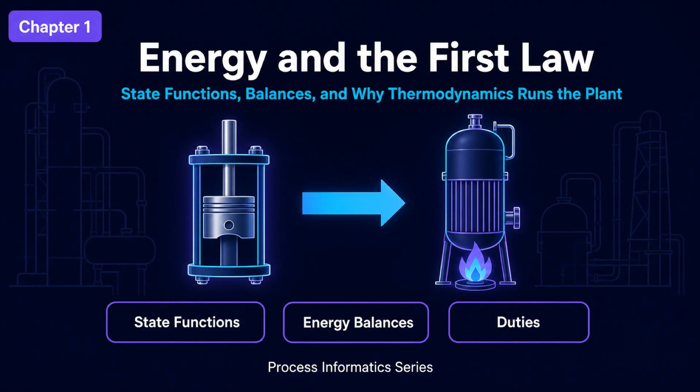Thermodynamics answers 3 questions that no rate law can touch. First, how much energy does a transformation require or release? Kinetics tells you how fast a reaction runs. Only thermodynamics tells you how much heat you must add or remove while it does. Second, how far can it go? Equilibrium is a thermodynamic limit. A better catalyst reaches it sooner. Nothing takes you past it.

Third, which direction is spontaneous? Whether a process runs by itself or has to be driven, and at what minimum cost, is decided by the second law, which is Chapter 2. That gives us the division of labor worth memorizing: kinetics governs rate, thermodynamics governs possibility and price.

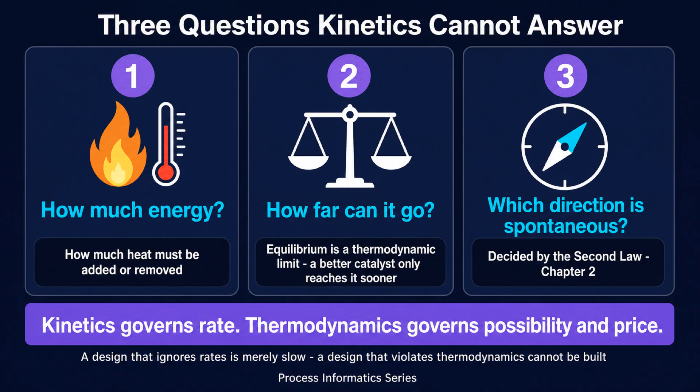The practical consequence is asymmetric and worth pausing on. A design that ignores rates is merely slow, and you can usually fix it with a larger reactor or a better catalyst. A design that violates thermodynamics cannot be built at all, and no amount of engineering effort will rescue it. That is why thermodynamics gets checked first.

Every thermodynamic statement begins with a choice: what are we accounting for? The region selected is the system, everything else is the surroundings, and the imaginary surface between them is the boundary. That boundary is chosen by the engineer, not given by nature. Draw it around one heat exchanger and you get its duty. Draw it around the plant and you get the site utility bill.

Systems are classified by what the boundary lets through. Open systems pass both mass and energy, which covers pumps, reactors, heat exchangers, and columns, so most of a plant. Closed systems pass energy but not mass, like a sealed batch vessel. Isolated systems pass nothing, an idealization used for reasoning.

Now the most useful distinction in this chapter. State functions, such as internal energy, enthalpy, temperature, pressure, and volume, depend only on the current state. Path functions, heat and work, depend on how the system got there. Because a change in a state function can be computed from tables without knowing the path, steam tables and process simulators are possible at all.

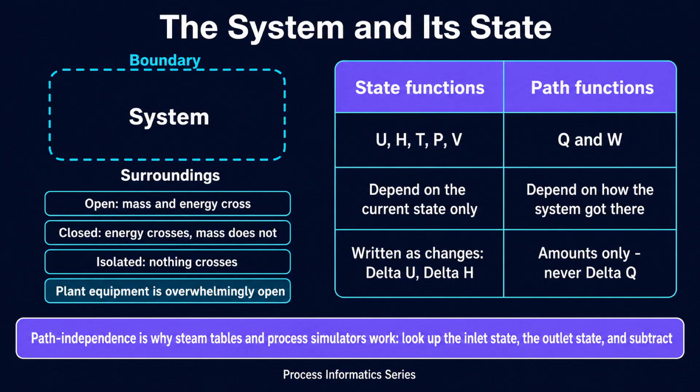The first law of thermodynamics is conservation of energy with heat and work counted honestly. For a closed system, delta U equals Q minus W. The sign convention must be stated explicitly, because textbooks differ. Here, as in most chemical engineering practice, Q is positive when heat flows into the system, and W is positive when work is done by the system on the surroundings. Heat in raises internal energy, work out lowers it.

Most plant equipment is not closed, though. It flows. For an open system at steady state with one inlet and one outlet, neglecting kinetic and potential energy terms, the working form is delta H equals Q minus shaft work. The reason enthalpy appears instead of internal energy is that flowing material carries its own pressure-volume energy across the boundary, and enthalpy bundles that in by definition. H equals U plus PV. For a heat exchanger, a reboiler, or a condenser, there is no shaft work at all, and the equation collapses to the most used expression in process engineering.

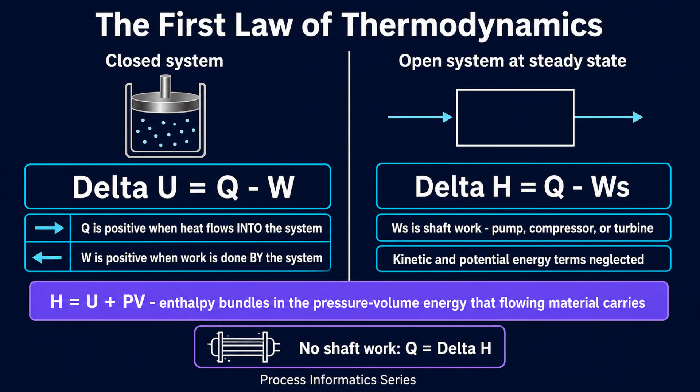Q equals delta H. Let's put numbers on it. Take 1 kilogram of liquid water at 25 degrees Celsius and turn it into saturated steam at 100 degrees Celsius and 1 atmosphere. The path splits into 2 physically distinct steps.

Step 1 is sensible heat, warming the liquid. Using a specific heat capacity of about 4.18 kilojoules per kilogram per Kelvin, heat is mass times heat capacity times temperature change: 1 times 4.18 times 75, which gives 313.5 kilojoules.

Step 2 is latent heat, boiling it at constant temperature. Using a latent heat of about 2257 kilojoules per kilogram, that step costs 2257 kilojoules. The total is 313.5 plus 2257, which is 2570.5 kilojoules.

Now look at the split. The vaporization step costs about 7.2 times as much as heating the liquid through those 75 degrees, and it happens at constant temperature, so a thermometer reports nothing at all while the great majority of the energy goes in. That ratio is the reason evaporation and distillation dominate plant energy budgets. Boiling is where the money goes.

Specific heat capacity is the energy needed to raise 1 kilogram of a substance by 1 Kelvin at constant pressure. It is a material property, mildly temperature dependent, and for hand calculations, an average value over the range is normally good enough. Compare a few classes of material.

Liquid water sits near 4.18 kilojoules per kilogram per Kelvin, with a latent heat of 2257 kilojoules per kilogram at 100 degrees Celsius and 1 atmosphere. Organic liquids run about 1.5 to 2.5, with latent heats of roughly 300 to 900 kilojoules per kilogram. Gases are of order 1.

Liquid water is a conspicuous outlier, roughly twice the heat capacity of a typical organic liquid, which is why it is both an excellent coolant and an expensive thing to boil.

The pattern across the table is the practical rule of this chapter: phase changes are expensive, and temperature changes are comparatively cheap. Heating an organic liquid through a large 50 Kelvin span costs perhaps 75 to 125 kilojoules per kilogram. Boiling it costs several hundred.

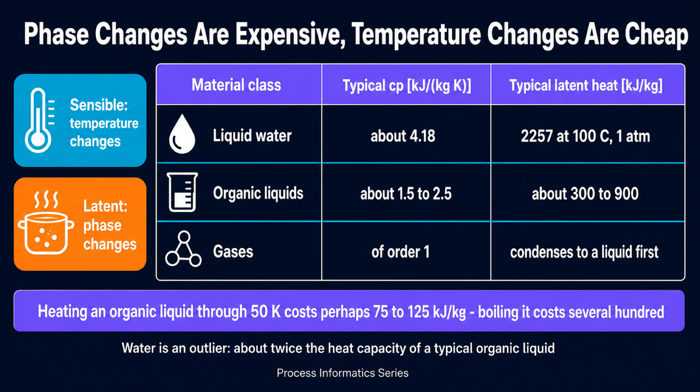On a flow sheet, the first law becomes an arithmetic you can do on the back of an envelope. For a stream of a given mass flow rate, with no phase change, the heat is the mass flow rate times the heat capacity times the temperature change. With a phase change, it is the mass flow rate times the latent heat.

The result, called the duty, is the required heat rate in kilowatts or megawatts. It sizes the exchanger, it sets the steam or cooling water flow, and it lands directly on the operating cost line. This is why a distillation column's reboiler and condenser are usually the largest utility consumers on a flow sheet.

A column does not merely warm its feed. It boils a stream at the bottom and condenses it again at the top, repeatedly, because the reflux return to the column must be vaporized once more on every pass. Multiply a latent heat of hundreds or thousands of kilojoules per kilogram by that reflux-amplified internal flow, and the column dwarfs the pumps, the preheaters, and often the reactor itself.

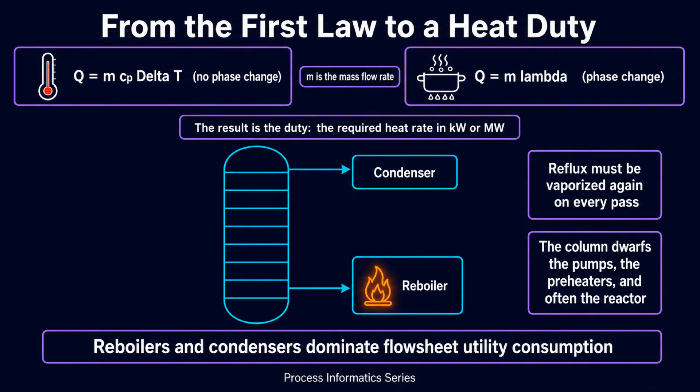The chapter's code example makes the point quantitatively. It sweeps the feed temperature and splits the duty of making saturated steam at 100 degrees Celsius into its sensible and latent parts. Feed at 20 degrees needs 334.4 kilojoules per kilogram of sensible heat plus 2257 of latent heat, a total of 2591.4. So the latent term supplies 87.1%, a ratio of 6.75.

Feed at 25 degrees gives 313.5 plus 2257, or 2570.5, and 87.8%. At 40 degrees, sensible heat falls to 250.8, and latent heat is 90%. At 60 degrees, 167.2 and 93.1%. At 80 degrees, only 83.6 kilojoules per kilogram of sensible heat remains, and latent heat is 96.4% of the total.

Now read what that says about feed preheating. Raising the feed from 20 to 80 degrees removes 250.8 kilojoules per kilogram from the boiler's job, which is real money. But 2257 kilojoules per kilogram of it never goes away. Preheat all you like, the phase change is untouched.

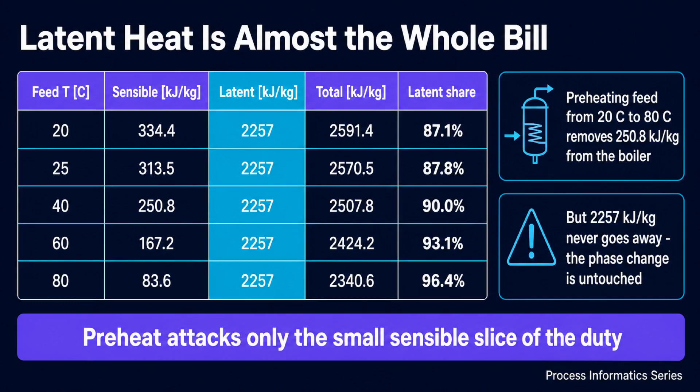Step back to why this chapter is titled the way it is. The Chemical Engineering Introduction series observed that the energy balance, not the mass balance, usually decides whether a process is worth building. This chapter is where that claim finally gets its arithmetic. Once you can compute a duty, you can price a process, and pricing is what design decisions actually turn on.

There is an obvious question waiting here. In a distillation column, the condenser rejects almost as much energy as the reboiler supplies, so why not feed one with the other? Sometimes you can. Heat integration and multi-effect evaporation do exactly that.

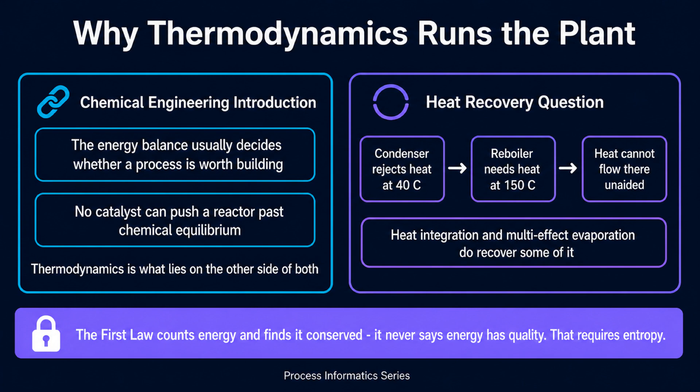But the limit on how much can be recovered is not a first law limit. The first law counts energy and finds it conserved. It never says that heat rejected at 40 degrees Celsius is worth less than heat supplied at 150 degrees Celsius. That accounting, the one saying energy has quality as well as quantity, requires entropy, and that is where we go next.

Let's pull the chapter together. Thermodynamics answers 3 questions kinetics cannot: how much energy, how far (meaning equilibrium), and which direction (meaning spontaneity). Kinetics governs rate, thermodynamics governs possibility and price.

Analysis starts by drawing a boundary. Open systems exchange mass and energy, closed ones only energy, isolated ones neither, and plant equipment is overwhelmingly open. State functions depend only on the current state, while path functions, heat and work, depend on the route, which is why enthalpy changes can be read from steam tables.

The first law for a closed system is delta U equals Q minus W, with Q positive into the system and W positive by the system. At steady flow, it is delta H equals Q minus shaft work, where H equals U plus PV.

Heating 1 kilogram of water from 25 degrees Celsius to saturated steam at 100 takes 313.5 kilojoules of sensible heat plus 2257 of latent heat, or 2,570.5 kilojoules total, the latent term being about 7.2 times the sensible one.

Next chapter: Entropy and the second law.

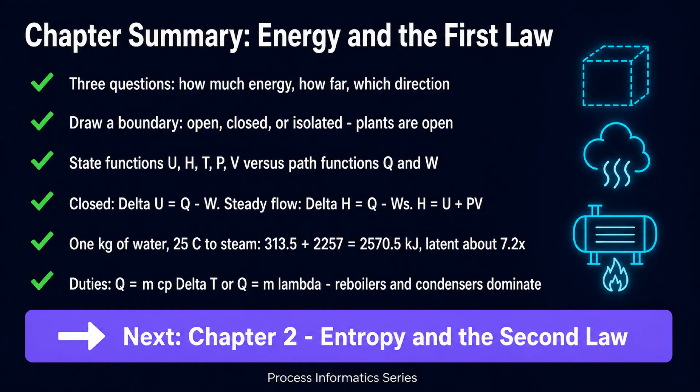Welcome to Chapter 2 of Chemical Engineering Thermodynamics. Chapter 1 gave us a ledger: energy is conserved, and we can count it. This chapter gives us a compass.

The first law audits quantity, but it never tells you which way a process will actually go on its own. The second law does. Across these 10 slides, we will do 4 things.

First, see why energy conservation alone cannot predict the direction of a process. Second, define entropy as a state function and state the second law as the entropy of the universe never decreasing. Third, use that law to derive a hard ceiling on how much work any engine can extract from heat, the Carnot efficiency, and see why work is thermodynamically more valuable than heat.

Fourth, apply exactly the same reasoning to separation, computing the minimum work needed to unmix a mixture, and comparing it with what real distillation columns actually consume. We finish with Gibbs energy, the single criterion that carries us into chapters 3 and 4.

Drop a hot steel block into cold water. Heat flows from the block into the water until both reach the same temperature and energy is conserved. Now imagine the reverse: the water spontaneously cools while the block heats up. Energy would be conserved just as exactly. Nothing in the first law forbids it, and yet it never happens.

The same asymmetry is everywhere in a plant. Stir ethanol into water and you get a solution, but the solution never separates itself back into 2 layers. A gas leaks from a cylinder into a room, but it never crowds back into the cylinder. Every one of these processes conserves energy in both directions, yet only one direction is ever observed.

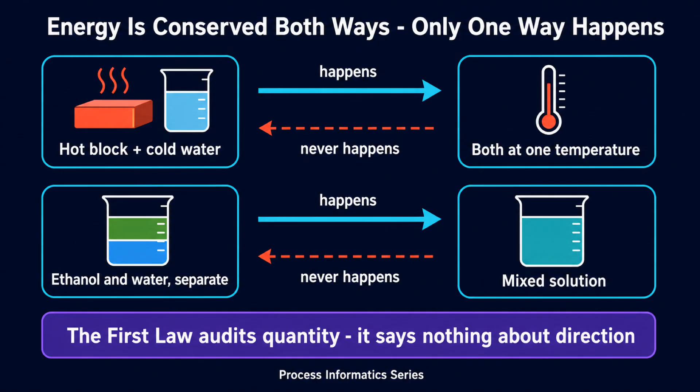The first law is a bookkeeper. It audits quantity, but it says nothing whatsoever about direction. Something else is doing the choosing, and that something is the second law of thermodynamics. The quantity it tracks is entropy.

Entropy, given the symbol S, is a state function with units of joules per Kelvin. Like internal energy or enthalpy, it depends only on the current state of a system, not on how the system got there. For a reversible transfer of heat at constant absolute temperature T, the entropy change equals Q reversible divided by T. The temperature in the denominator carries the physical meaning.

The same joule of heat produces a larger entropy change when it enters a cold body than when it enters a hot one. That is exactly why the hot block heats the water and not the reverse. The entropy the block loses at high temperature is smaller than the entropy the water gains at low temperature, so the transfer increases the total.

Statistically, entropy counts possibilities. A macroscopic state that can be realized by an enormous number of molecular arrangements, called microstates, is overwhelmingly more probable than one realizable in only a few ways. Entropy is the logarithm of that count.

The second law states it compactly. The entropy change of the universe, which is the entropy change of the system plus the entropy change of the surroundings, is greater than or equal to 0.

Read that carefully because it is often misquoted. The entropy of a system can certainly fall. A refrigerator freezes water every day, but it can only fall if the surroundings gain more entropy than the system loses. Equality holds only for a reversible process.

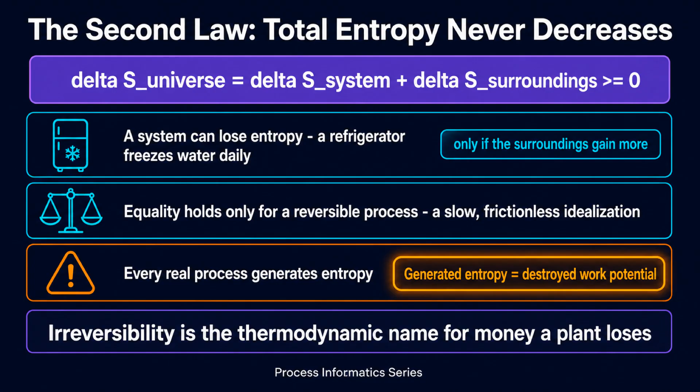Every real process generates entropy, and that generated entropy is destroyed work potential. This is the point to carry into your engineering career. Generated entropy is the thermodynamic name for the money a plant loses to irreversibility, and it appears on the utility bill every single month. The most consequential result of the second law concerns converting heat into work.

A heat engine takes heat from a hot reservoir at temperature Th, produces work, and must reject some heat to a cold reservoir at temperature Tc. That rejection is not an engineering failure to be designed away. It is what keeps the total entropy from decreasing.

Requiring the entropy of the universe to be greater than or equal to 0 gives a hard ceiling on efficiency. Eta maximum equals 1 minus Tc divided by Th, with both temperatures absolute in Kelvin.

Take a steam power plant with a boiler at 500 degrees Celsius and cooling water at 25 degrees Celsius. That is 773 Kelvin and 298 Kelvin, so eta maximum is 1 minus 298 over 773, which is 0.614, or 61.4%. No boiler design, working fluid, or turbine metallurgy can beat that.

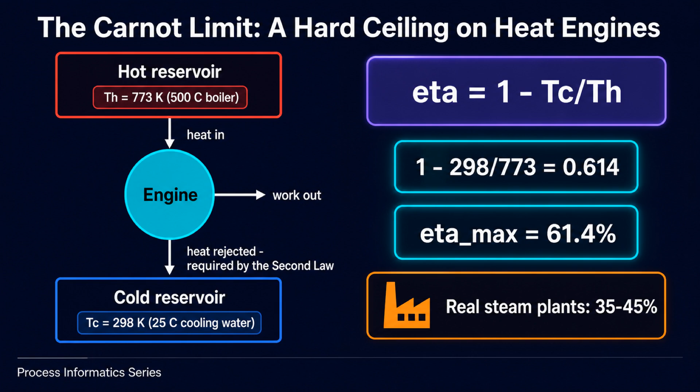Real steam plants land well below it, typically in the 35 to 45% range. The engineering lesson runs deeper than power generation.

Heat and work are both measured in joules, but they are not interchangeable. Work converts to heat completely and freely, while heat converts to work only partially, and the fraction shrinks as the source gets colder. So rank them.

Work, meaning electricity, shaft power, and compression, has high thermodynamic value because it is fully convertible, which makes it expensive. Buy as little of it as you can.

High-temperature heat from a fired heater or high-pressure steam has moderate value and is worth cascading down to lower-temperature duties. Low-temperature heat, low-pressure steam, or warm water has low value. It is nearly worthless for work, though still useful for heating.

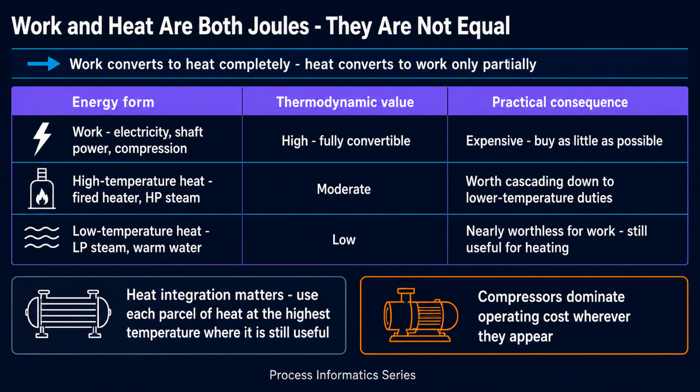Two plant realities follow directly. Heat integration matters, and pinch analysis is the scheme for it. And compressors dominate operating cost wherever they appear, because they consume work and no amount of waste heat can substitute.

Now apply exactly the same logic to the plant's other great energy consumer. Mixing is spontaneous because it increases entropy. A mixture has vastly more microstates available to it than the separated components do, so mixing is simply what almost all arrangements look like. But if spontaneous mixing raises entropy, then unmixing must lower it, and by the second law that can only be paid for with work brought in from outside.

This is why separation is never free, and why no equipment, however clever, can beat the thermodynamic minimum, though better equipment can close the gap toward it.

For an ideal binary mixture of mole fraction x, the entropy of mixing per mole equals minus R times the quantity x times the natural log of x, plus 1 minus x times the natural log of 1 minus x. The minimum reversible work needed to undo that mixing at temperature T is simply that entropy multiplied by T, that is the number we compute next.

So write the minimum work as W minimum equals minus RT times the quantity x times log x plus 1 minus x times log of 1 minus x. Take an equimolar mixture at 298 Kelvin, with R equal to 8.314 joules per mole Kelvin. The bracket for a 50-50 split is 0.693, so W minimum equals 8.314 times 298 times 0.693, which is 1717 joules per mole, about 1.72 kilojoules per mole.

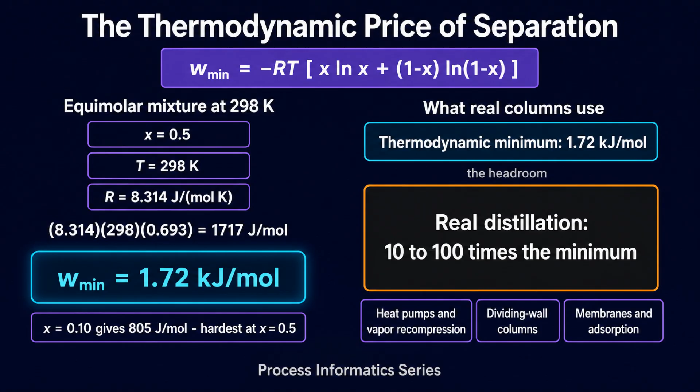Tracking the entropy of the universe means accounting for the surroundings, which is awkward in practice. Fortunately, chemical engineers almost always work at constant temperature and pressure, and for those conditions, the second law repackages into a property of the system alone. The Gibbs energy, G equals H minus TS, is the criterion it yields.

At constant temperature and pressure, if delta G is less than 0, the process is spontaneous in the direction written. If delta G equals 0, the system is at equilibrium, with no net change. If delta G is greater than 0, the process is non-spontaneous, and the reverse direction is the spontaneous one.

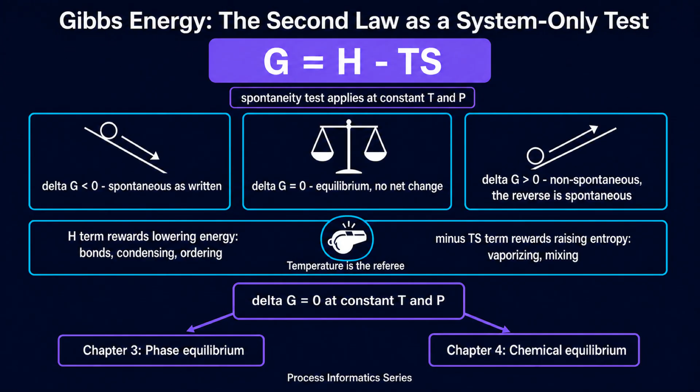Read the definition as a competition. The enthalpy term rewards lowering energy, forming bonds, condensing, and ordering. The minus TS term rewards raising entropy, breaking bonds, vaporizing, and mixing. Temperature is the referee, and raising it strengthens the entropy side. That is why a liquid boils when hot and freezes when cold.

Let's pull the chapter together. The first law audits energy quantity but permits both directions, and the second law supplies the direction. Entropy S is a state function, equal to Q reversible over T for isothermal reversible heat transfer, and statistically it counts the microstates available to a state. The entropy of the universe is greater than or equal to zero, with equality only for idealized reversible processes, so every real process generates entropy and destroys work potential.

Carnot gives eta maximum equal to 1 minus Tc over Th with absolute temperatures. 500 degrees Celsius over 25 degrees Celsius gives 61.4%, while real steam plants reach roughly 35 to 45%. Work is precious and heat is comparatively cheap.

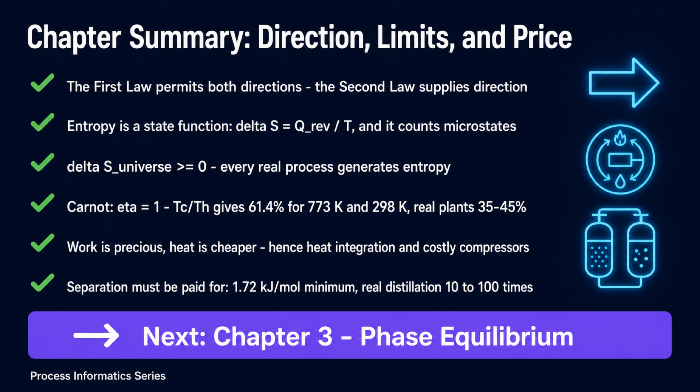Separation must be paid for, at 1.72 kilojoules per mole for an equimolar mixture at 298 Kelvin, while real distillation typically uses 10 to 100 times that. Next chapter, we apply delta G equal to 0 to coexisting phases: vapor-liquid equilibrium, Raoult's law, activity coefficients, and azeotropes.

Welcome to Chapter 3 of the Chemical Engineering Thermodynamics series. Chapters 1 and 2 built the two laws. This chapter spends them on a single question: when a liquid and its vapor sit together in a closed vessel, what is in each phase?

The title is Phase Equilibrium, and the subtitle is Vapor-Liquid Equilibrium, Raoult's Law, and Azeotropes. Every distillation column, every flash drum, every absorber and condenser you will ever design is sized from the answer to that question. Over the next 10 slides, we will state the equilibrium criterion in terms of temperature, pressure, and chemical potential, and count degrees of freedom with the Gibbs phase rule.

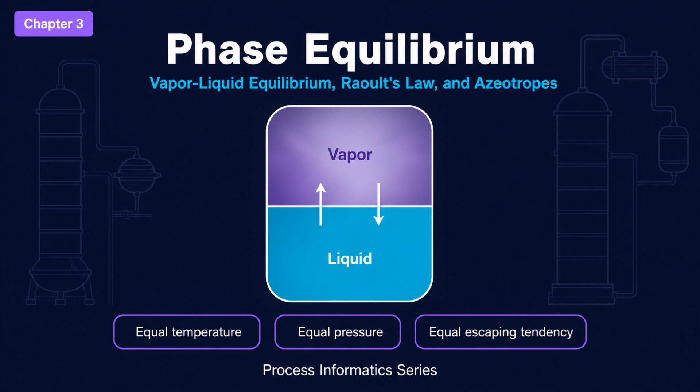Look at how vapor pressure climbs with temperature. Apply Raoult's law to an ideal binary. Read a real temperature composition diagram with its tie line. And finish with the activity coefficients and azeotropes that decide when ordinary distillation simply stops working.

Chapter 2 ended with the working criterion of equilibrium: at fixed temperature and pressure, a system moves until its Gibbs energy is a minimum. Apply that to a closed vessel holding a liquid and its vapor, and it resolves into three qualities that must hold at once. The first is thermal.

The temperature is the same in both phases, because a hot spot would drive heat flow. The second is mechanical: the pressure is the same in both phases because a pressure difference would move the interface. The third does the real work.

The chemical potential of every species must be equal in both phases. Engineers usually restate that in terms of fugacity, which is equivalent but carries units of pressure and reduces to partial pressure for an ideal gas. Fugacity reads as an escaping tendency, how hard a species is trying to leave its phase, so equilibrium is not stillness.

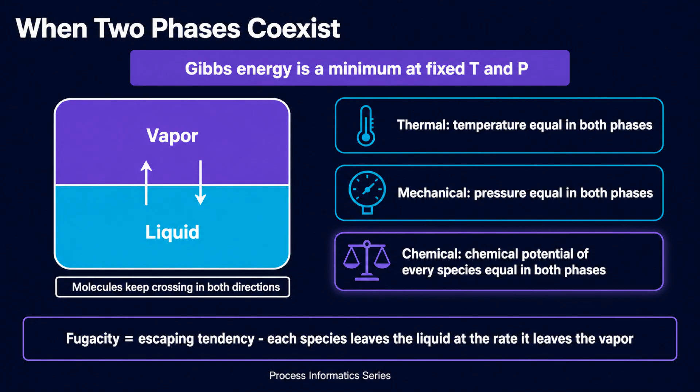Molecules cross the interface constantly in both directions. It is the state where each species leaves the liquid at exactly the rate it leaves the vapor, so the compositions stop changing. Before computing anything, it pays to know how many variables you are allowed to specify.

The Gibbs phase rule answers that. F equals C minus pi plus 2, where C is the number of species, pi is the number of phases in equilibrium, and F is the number of intensive variables, meaning temperature, pressure, and compositions that you may fix freely. We write the phase count as pi rather than p so that it cannot be confused with pressure.

Three counts make it concrete. Pure water boiling, 1 component and 2 phases, gives F equal to 1. Fix the pressure and the boiling temperature follows, which is exactly why a pressure cooker works.

The water triple point, 1 component and 3 phases, gives F equal to 0. That is an invariant state at one unique temperature and pressure, which is why it serves as a fixed point for temperature scales. Binary vapor-liquid equilibrium, 2 components and 2 phases, gives F equal to 2.

Fix the column pressure and the liquid composition, and both the temperature and the vapor composition are determined. That is exactly what a TXY diagram displays.

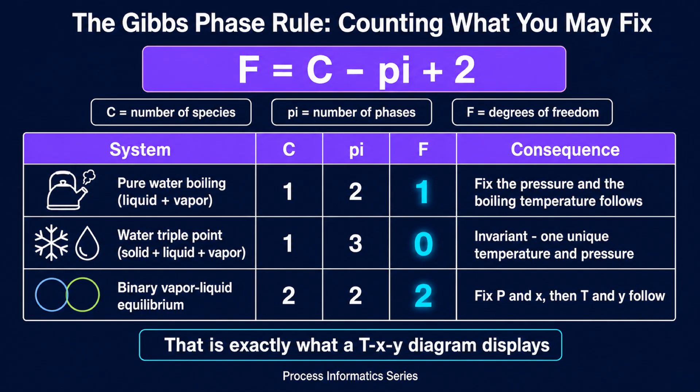All of vapor-liquid equilibrium is anchored on one pure component property: the saturation vapor pressure, the pressure at which pure species i boils at temperature T. It rises steeply, roughly exponentially, with temperature, because the fraction of molecules energetic enough to escape the liquid is governed by a Boltzmann factor, much like the Arrhenius term in kinetics.

Water is the familiar example. It exerts about 0.023 atmospheres at 20 degrees Celsius, 1 atmosphere at 100 degrees, and nearly 5 atmospheres at 150 degrees. That middle value gives us a definition: the normal boiling point is the temperature at which the saturation pressure equals 1 atmosphere.

The standard engineering correlation is the Antoine equation, which writes the base 10 logarithm of the saturation pressure as A minus B over the quantity T plus C, with A, B, and C fitted for each compound. Two cautions matter more than the constants themselves: the fit holds only over the temperature range it was made from, and each published set carries its own units for pressure and temperature. Mixing a bar-based set into an atmosphere-based calculation is a classic quiet error.

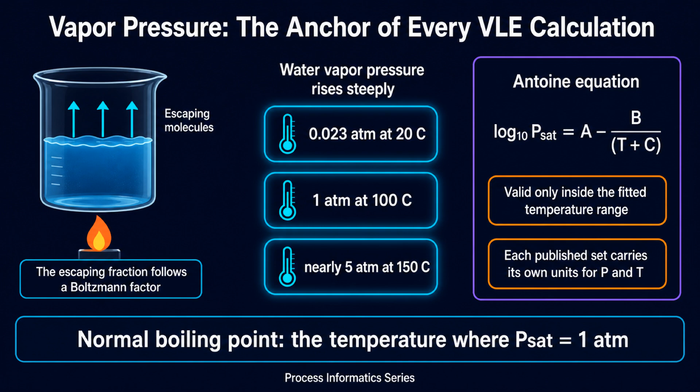The simplest useful model assumes a molecule cannot tell its neighbors apart, so an AB interaction has the average energy of AA and BB. Such an ideal solution obeys Raoult's law: the vapor mole fraction of species i times the total pressure equals the liquid mole fraction of i times its pure saturation pressure. In words, the partial pressure a species exerts above the mixture is its pure vapor pressure scaled by how much of it sits in the liquid.

Because the vapor fractions must add to 1, summing over species gives the bubble pressure, at which the first bubble of vapor appears. Take benzene and toluene at 90 degrees Celsius, with approximate textbook values of 1.34 atmospheres for benzene and 0.54 for toluene. For a liquid that is 40% benzene, the bubble pressure is 0.86 atmospheres, and the vapor comes out at 0.623 benzene. One equilibrium contact has already lifted 40% to 62.3%.

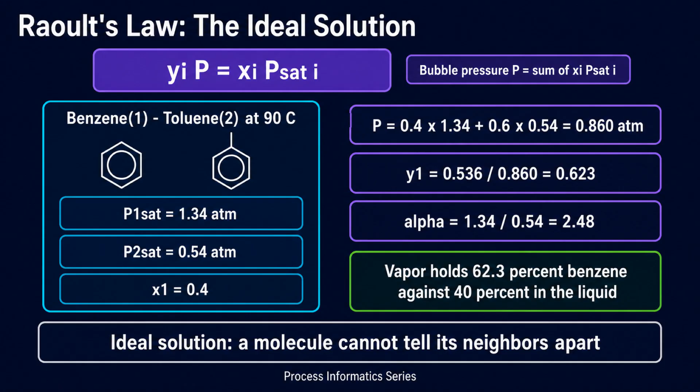The relative volatility, the ratio of those two saturation pressures, is 2.48, and that single number is what distillation design runs on. Here is the diagram the phase rule promised.

The same equilibrium information can be replotted in the form distillation engineers use even more often, the YX diagram. Vapor composition goes on the vertical axis, liquid composition on the horizontal, and the equilibrium curve carries the thermodynamics. For an ideal binary, the whole curve collapses to one expression driven by relative volatility: Y1 equals alpha times x1, divided by 1 plus the quantity alpha minus 1 times x1.

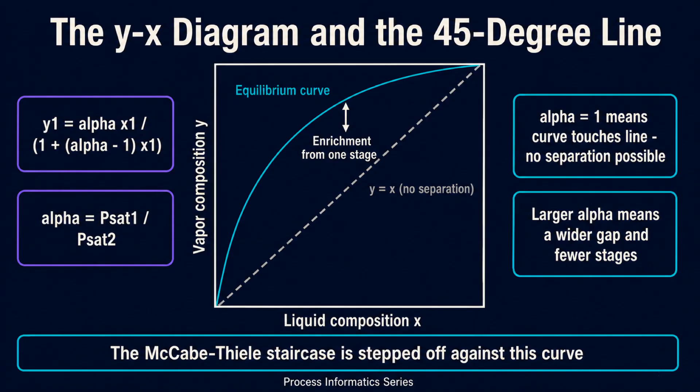Real mixtures are not ideal, and the fix is a correction on the liquid side called the activity coefficient, gamma. Raoult's law becomes yi times p equals gamma i times xi times the saturation pressure of i. By construction, gamma goes to 1 as the solution becomes ideal, and as species i approaches purity. Its value carries physical meaning: a positive deviation, gamma greater than 1, means unlike molecules attract each other less than like ones.

They push each other out, the pressure runs higher than Raoult predicts, and a minimum boiling azeotrope becomes possible. A negative deviation, gamma below 1, means unlike molecules attract more strongly through hydrogen bonding or complexes, giving lower pressure and possibly a maximum boiling azeotrope. Ethanol and water is the textbook positive case. Push the deviation far enough and the enrichment falls to 0 at some intermediate composition. Then y equals x, alpha equals 1, and you have an azeotrope, a hard wall. Ethanol and water hit 1 at 1 atmosphere near 95.6 weight percent ethanol, about 89 mole percent, boiling at roughly 78.2 degrees Celsius.

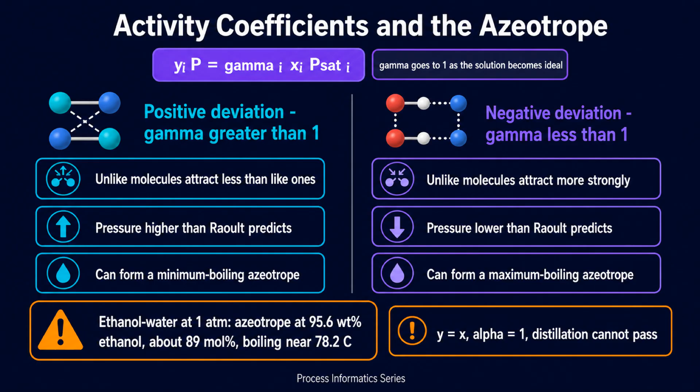An azeotrope is not defeated by building a taller column. The vapor leaving a stage matches the liquid on it, so an extra stage accomplishes nothing, and no reflux ratio and no column height gets past it. That is why ordinary distillation of a fermentation broth stops just short of 96 weight percent ethanol. Industry gets past it by changing the thermodynamics rather than the column, and there are 3 standard routes.

Pressure swing distillation exploits the fact that the azeotropic composition shifts with pressure, so 2 columns operated at different pressures step around it. Extractive distillation adds a high boiling entrainer, an added separating agent such as ethylene glycol, which alters the activity coefficients enough to break the azeotrope.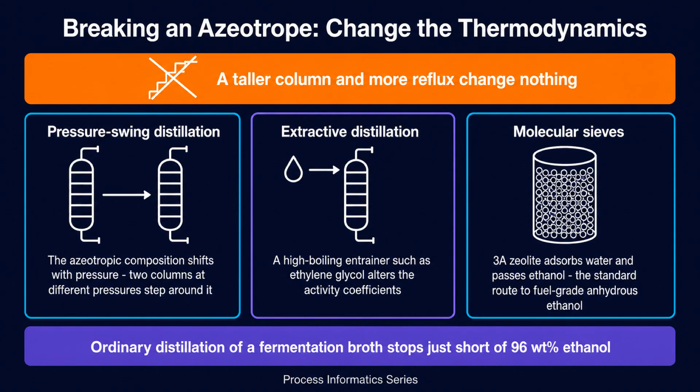Molecular sieves sidestep equilibrium altogether. A 3A zeolite bed adsorbs water and passes ethanol, and that is the standard route to fuel-grade anhydrous ethanol. The lesson generalizes: when the thermodynamics blocks a separation, change the thermodynamics, rather than spending capital on equipment that cannot help. Let us pull the chapter together.

Phase equilibrium requires 3 equalities across phases: temperature, pressure, and the chemical potential, equivalently the fugacity of every species, that last one being equality of escaping tendencies. The Gibbs phase rule, F equals C minus pi plus 2, counts what you may specify: 1 for a boiling pure liquid, 0 at a triple point, 2 for binary vapor-liquid equilibrium.

Vapor pressure rises roughly exponentially with temperature and is correlated by the Antoine equation, valid only within its fitted range and units. Raoult's law describes ideal solutions of chemically similar species, and the bubble pressure is linear in composition. Relative volatility, the ratio of the two saturation pressures, is the parameter distillation design runs on, and benzene-toluene at 90 degrees Celsius gives 2.48. Activity coefficients correct Raoult's law for real mixtures, and positive deviations can produce azeotropes where ordinary distillation stops.

Next chapter applies the same Gibbs criterion to species that convert into one another rather than merely change phase: chemical equilibrium.

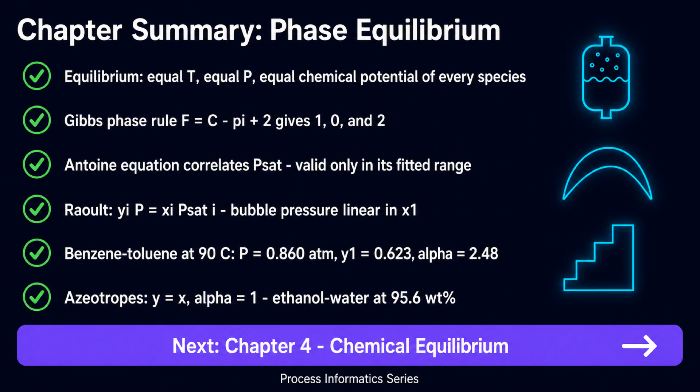Welcome to Chapter 4 of Chemical Engineering Thermodynamics. Chapter 3 asked how matter distributes itself between phases. This chapter asks the analogous question for reactions. Given a feed and a set of conditions, how far can the reaction go before it stops? And what can an engineer actually do about the answer? That is a different question from the one most people ask first, which is how fast?

Over the next 9 slides, we build the answer in 4 steps. First, we separate the kinetic question from the thermodynamic question and settle a classic misconception about catalysts. Second, we introduce the equilibrium constant and the relation that fixes it, the standard Gibbs energy of reaction. Third, we work out how the equilibrium position responds to temperature, pressure, and composition, and why the constant itself moves only with temperature. And fourth, we watch those results turn into hardware, in ammonia synthesis, in multi-bed reactors with interstage cooling, and in reactors designed to remove their own product.

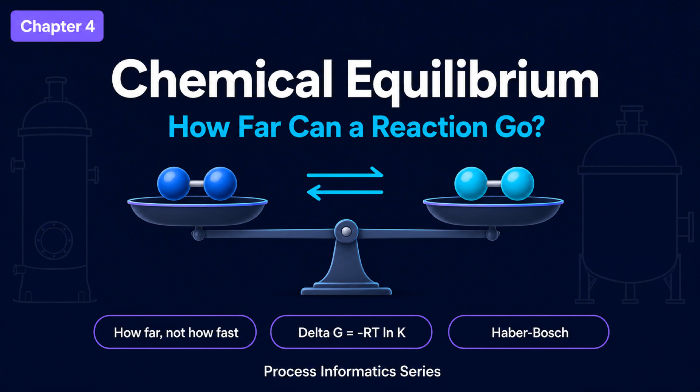By the end, you will be able to look at an underperforming reactor and say which limit it is hitting. A reaction is described by 2 independent questions, and confusing them is the most common error in introductory reaction engineering. Kinetics asks how fast; that is rate laws, the Arrhenius equation, and reactor sizing, covered in Chemical Engineering Introduction Chapter 2. Kinetics governs the path and the time required. Thermodynamics asks how far: given unlimited time, what composition does the mixture settle into? That is a property of the initial and final states only. It does not care what route the molecules take, how many intermediates exist, or whether a catalyst is present.

Which brings us to the blunt statement: a catalyst cannot change the equilibrium composition. It only accelerates the approach to it. The reason is structural. A catalyst lowers the activation energy of the forward reaction, but a catalyst is not consumed, so it must lower the reverse activation energy by exactly the same amount. Both rates rise by the same factor, and the ratio at which they balance is unchanged.

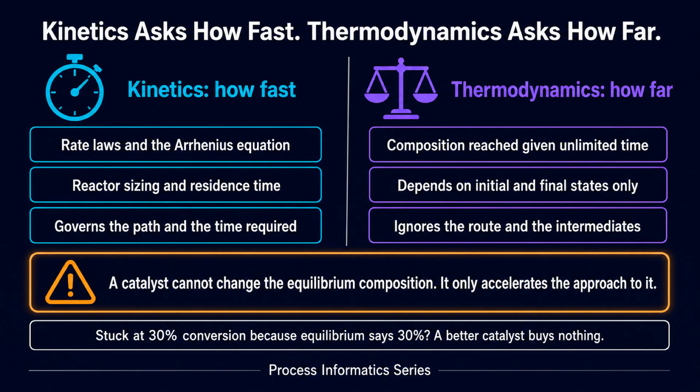The practical consequence: if a reactor is stuck at 30% conversion because equilibrium says 30%, a better catalyst buys you nothing. At constant temperature and pressure, a reacting mixture moves toward minimum Gibbs energy. At that minimum, the composition stops changing, and the standard Gibbs energy of reaction fixes the equilibrium constant.

The relation is delta G standard equals minus RT times the natural logarithm of K, or equivalently, K equals the exponential of minus delta G standard over RT.

What is K? It is a ratio of activities of products to reactants, each raised to its stoichiometric coefficient, evaluated at equilibrium. For an ideal gas mixture, the activity is the partial pressure divided by the standard pressure of 1 bar, so K is built from partial pressure ratios and is dimensionless. For an ideal solution, it is built from mole fractions or concentrations relative to a standard state.

Take a worked example. A reaction has a standard Gibbs energy of minus 20 kilojoules per mole at 298 Kelvin. K is the exponential of 20,000 divided by 8.314 times 298, which is the exponential of 8.07, or about 3.2 times 10 to the third. So K is roughly 3,200. At equilibrium, products dominate overwhelmingly.

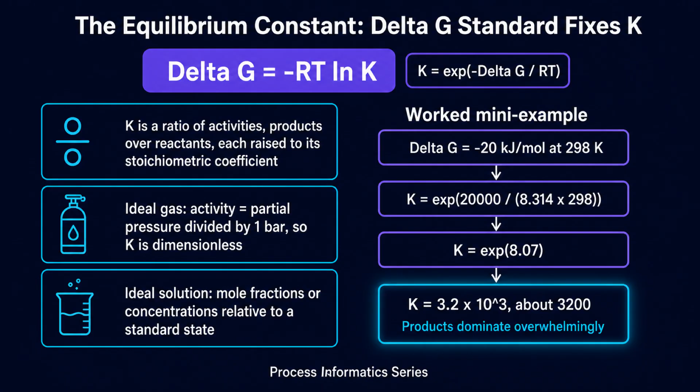Now notice what that exponential does to you. A shift of only 5.7 kilojoules per mole in the standard Gibbs energy of reaction, which is a rounding error by the standards of chemical intuition, multiplies or divides K by 10 at room temperature. Modest changes in delta G standard swing K by orders of magnitude. This is why equilibrium calculations are unforgiving of sloppy thermodynamic data, and why a reaction that should work on paper sometimes has an equilibrium constant of 10 to the minus 6.

The sign rules follow. Strongly negative, below about minus 20 kilojoules per mole, gives K far greater than 1 and an essentially complete reaction. Negative gives K greater than 1, products favored. 0 gives K equal to 1, comparable amounts of both. Positive gives K less than 1, reactants favored. Strongly positive, above about plus 20 kilojoules per mole, gives K far below 1 and a reaction that barely proceeds unaided.

One caution: this is the standard state value. The actual driving force depends on the real composition, so a reaction with K below 1 still proceeds usefully if the products are kept scarce.

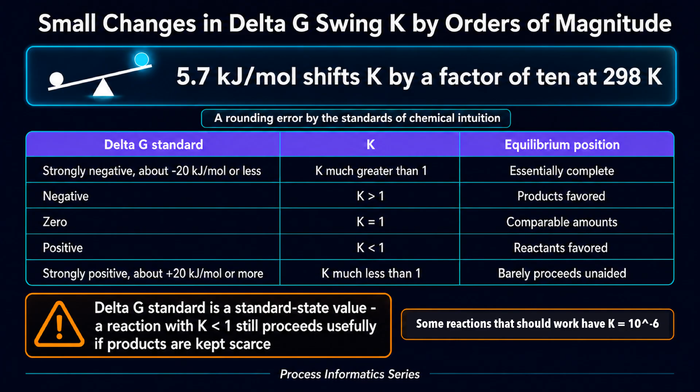K is fixed at a given temperature, but it is a strong function of that temperature. The Van't Hoff equation states that the derivative of the natural logarithm of K with respect to temperature equals the standard enthalpy of reaction divided by R times temperature squared. Because R times temperature squared is always positive, the sign of the standard enthalpy decides everything.

For an exothermic reaction, the logarithm of K decreases as temperature rises, so the attainable conversion falls with temperature. For an endothermic reaction, the logarithm of K increases as temperature rises, so heat helps. This is the thermodynamic root of the statement that raising the temperature of an exothermic reaction lowers its equilibrium conversion. It is not an empirical oddity. It follows directly from the sign.

Apply the integrated form to an exothermic reaction of ammonia synthesis magnitude, with a standard enthalpy of minus 92 kilojoules per mole. Going from 300 to 800 Kelvin, K falls from about 4.454 times 10 to the fifth to about 4.333 times 10 to the minus fifth, a collapse of about 10 orders of magnitude. Near complete at room temperature becomes thermodynamically hopeless.

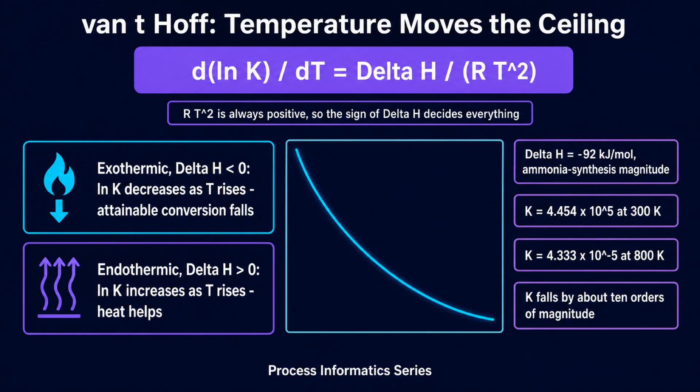Le Chatelier's principle, qualitatively: a system at equilibrium responds to a disturbance in the direction that partially opposes it. Compress it, and it shifts toward fewer molecules. Heat it, and it shifts in the endothermic direction.

The quantitative version for gases runs through the change in mole number, delta N, which is moles of gaseous product minus moles of gaseous reactant. K itself depends only on temperature, but the mole fraction composition that satisfies K depends on total pressure whenever delta N is not 0. If delta N is negative, meaning fewer moles of gas on the product side, higher pressure raises conversion. If delta N is positive, higher pressure lowers conversion. If delta N is 0, pressure has no effect on the equilibrium composition at all.

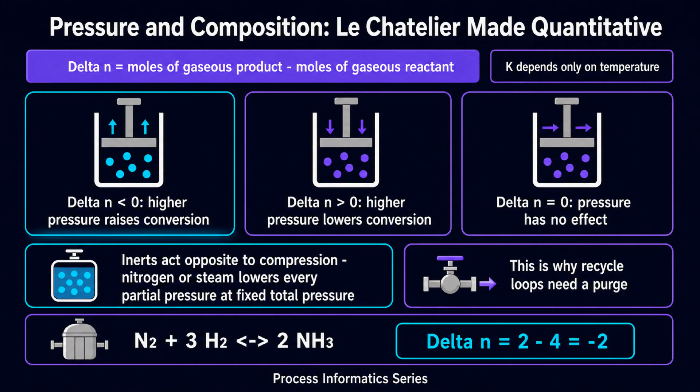Inerts act in the opposite direction to compression. Adding nitrogen or steam that takes no part in the reaction lowers every partial pressure at fixed total pressure, which shifts a negative delta N reaction backward. That is exactly why recycle loops need a purge. For ammonia synthesis, nitrogen plus 3 hydrogen gives 2 ammonia, so delta N is 2 minus 4, or minus 2.

Ammonia synthesis is where these rules collide. Thermodynamics gives an unambiguous prescription. Delta N is minus 2, so Le Chatelier says high pressure. The standard enthalpy is about minus 92 kilojoules per mole of nitrogen, so Van 't Hoff says low temperature.

Kinetics gives the opposite instruction on temperature. The nitrogen triple bond is so strong that at low temperature nothing happens at a useful rate, catalyst or not. The historic resolution is the Haber-Bosch compromise.

An iron-based catalyst, with typical textbook operating ranges of roughly 400 to 500 degrees Celsius and 150 to 300 bar. The temperature is high enough for an acceptable rate and low enough that K has not collapsed entirely. The pressure is then pushed up to claw back what the temperature cost.

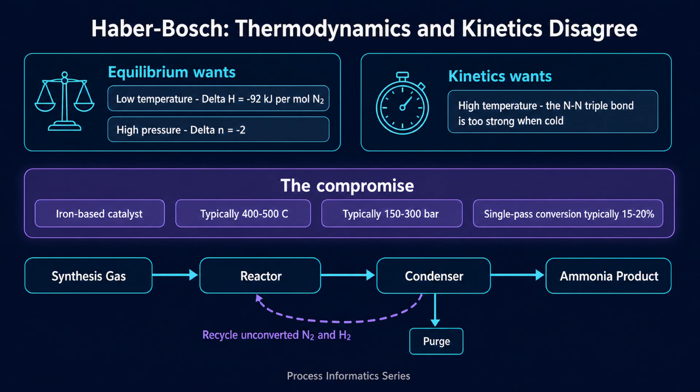Even so, single-pass conversion is modest, typically quoted in the 15 to 20% range. The remaining 80% or so of unconverted synthesis gas is separated, with ammonia condensed out and recycled. A reactor with unremarkable single-pass conversion delivers near-complete overall conversion because nothing is thrown away except a small purge.

Equilibrium sets the ceiling. Kinetics sets how quickly a reactor approaches it. Design consists of managing both at once, and adiabatic exothermic beds show why that is hard.

With no heat removal, the temperature of the bed rises as conversion rises. But we just established that for an exothermic reaction, rising temperature drives K down. So the bed is chasing a ceiling that is falling as it approaches. Conversion and temperature move together, and the equilibrium limit moves against you the whole way.

The standard answer is a multi-bed reactor with interstage cooling. React until the temperature approaches the equilibrium limit for that bed, then take the stream out, cool it in a heat exchanger, and feed it to the next bed. Each cooling step restores the headroom that the temperature rise consumed, and the reaction can run again.

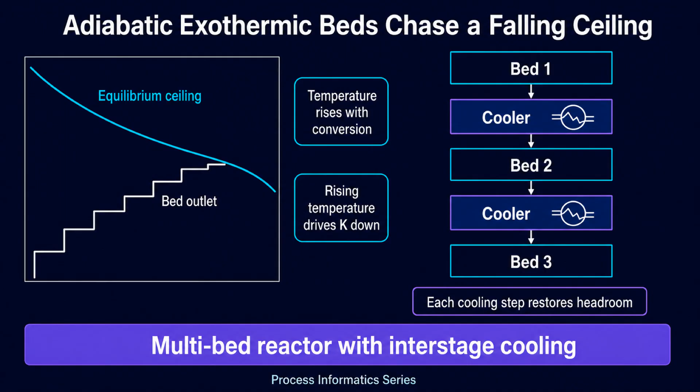This is why an ammonia converter is not one long vessel, but a stack of shallow beds with coolers between them. The hardware is a direct consequence of the Van 't Hoff equation.

There is one more way to beat the equilibrium ceiling, and it is the most elegant: refuse to let the mixture reach equilibrium at all. If the product is continuously taken out as it forms, the composition never satisfies the equilibrium condition, and the reaction simply keeps running. Two pieces of hardware do this.

Reactive distillation carries out the reaction inside a distillation column, so the product is boiled off as it forms. This is standard practice for esterifications, where the equilibrium constant is of order 1 or below, and yet near-complete conversion of the limiting reactant is routine.

Membrane reactors do the same job with a selective barrier, typically letting hydrogen permeate out of a reforming or dehydrogenation bed. Excess reactant is the cheap version of the same idea. Feeding one reactant in large excess shifts the attainable conversion of the other.

In every case, the cost is downstream: a bigger separation and a bigger recycle duty. That is the recurring trade in process design, and it is worth stating plainly before you reach for any of these. Let us pull the chapter together. Kinetics answers how fast, thermodynamics answers how far, and the two limits are independent.

A catalyst cannot move an equilibrium because it accelerates forward and reverse reactions equally, and K depends only on the standard Gibbs energy of reaction. That relation, delta G standard equals minus RT times the natural logarithm of K, means a negative delta G standard gives K greater than 1, and because it is exponential, small changes swing K by orders of magnitude.

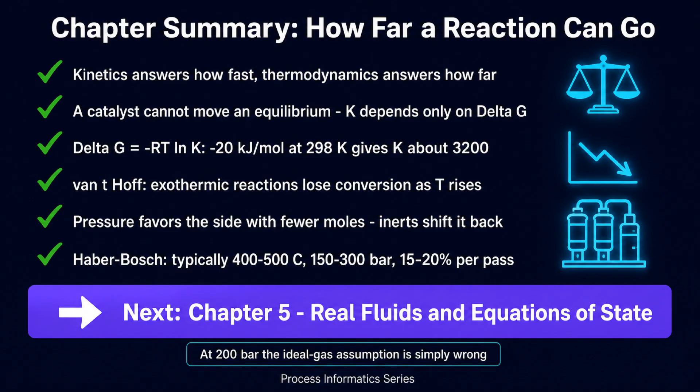Next chapter, everything here assumed ideal gas behavior. At 200 bar, the very condition ammonia synthesis demands, that assumption is simply wrong. Chapter 5 introduces real fluids and equations of state.

Welcome to the fifth and final chapter of our Chemical Engineering Thermodynamics series. Every chapter so far has quietly leaned on one convenient assumption: that gases behave ideally, that pressure times volume equals nRT. Today we retire that assumption. We will look at where the ideal gas law fails, and it fails exactly in the places engineers care about most, at high pressure and near condensation. We will define the compressibility factor, follow the van der Waals insight of 1873, and meet the two cubic equations of state that industrial simulators actually run on, Soave-Redlich-Kwong and Peng-Robinson. We will see how fugacity keeps Chapter 4's equilibrium arithmetic honest at 300 bar. Then we will look at the property package a simulator asks you to choose, and at why that single click quietly decides whether the answer is worth anything at all. From ideal gas to process simulator, let us begin.

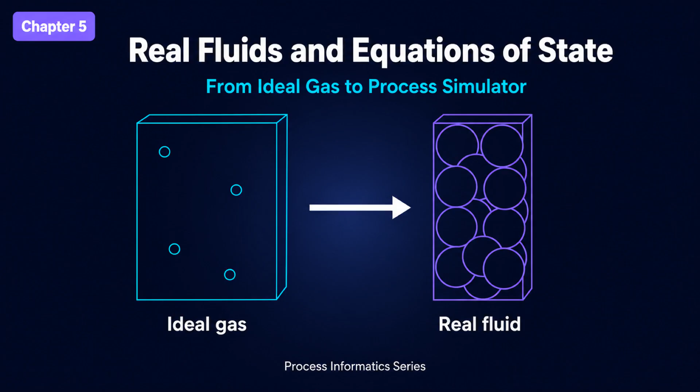The ideal gas law rests on two assumptions: that molecules occupy no volume and that they exert no forces on one another. Both are excellent approximations when molecules are far apart, at low pressure and high temperature, and that covers a great deal of introductory work and a fair amount of real plant operation. Both collapse under exactly the conditions engineers care about most.

Near condensation, attractive forces are the entire story. At high pressure, molecules are packed closely enough that their own volume matters. That is not an exotic corner of the operating map. It is the suction and discharge of every compressor. It is the 150 to 300 bar of the ammonia synthesis loop from Chapter 4. It is essentially all of natural gas processing and liquefaction.

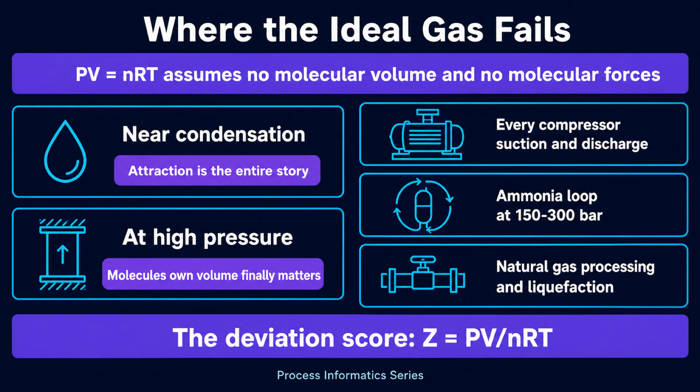Using PV equals nRT there does not produce a slightly rough answer, it produces a wrong one. The standard way to keep score is the compressibility factor, Z equals PV over nRT. Z is the ratio of the real molar volume to the ideal one. Z equal to 1 means ideal behavior, and any departure measures how badly the ideal gas law is lying.

Two regimes matter. When Z is below 1, attraction dominates. Molecules pull on each other, so the real gas is more compact than ideal. That is the common case at moderate pressure. When Z is above 1, repulsion dominates. At very high pressure, the finite size of the molecules themselves resists further compression, and the gas is less compact than ideal.

Follow methane at 300 Kelvin. At 1 bar, Z is 0.998, effectively ideal. At 50 bar it falls to 0.924, an 8% error if you ignore it. At 150 bar it reaches its deepest attraction effect, 0.851. Then it turns, and by 400 bar it has climbed to 1.070, with repulsion dominant. An 8% volume error propagates straight into compressor power, vessel sizing, and inventory.

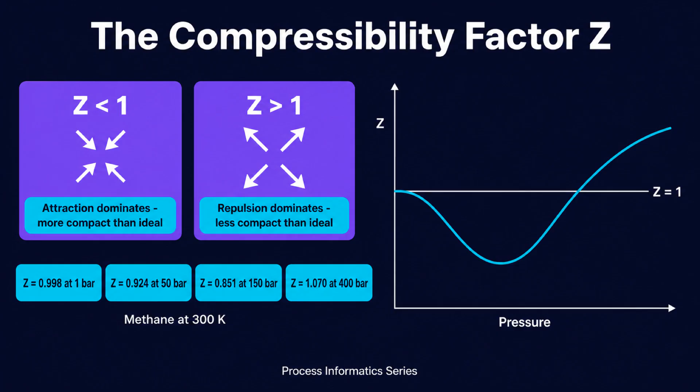The first successful answer came from Johannes Diederik van der Waals in his 1873 doctoral thesis, work that later won him the Nobel Prize. His idea was to patch the ideal gas law with one term for each failed assumption. The parameter A corrects for intermolecular attraction. Molecules pull inward, so the pressure the container feels is lower than the internal molecular pressure, and the term over molar volume squared adds it back.

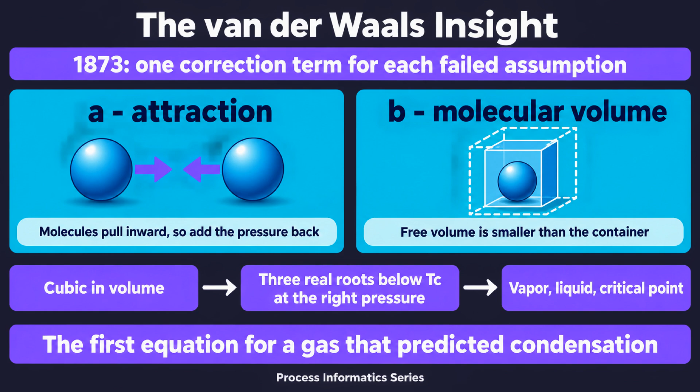The parameter B corrects for finite molecular volume. Molecules cannot be compressed into zero space, so the free volume is molar volume minus B. Both parameters are substance-specific, and both come from the substance's critical point. What makes this more than a curve fit is what falls out of it. Because the equation is cubic in volume, below the critical temperature it can return 3 real roots at a single pressure. The largest a vapor, the smallest a liquid, the middle one physically unstable. An equation written for a gas spontaneously predicts condensation, a liquid phase, and a critical point.

Two descendants dominate industrial process simulation: Soave-Redlich-Kwong, published by Soave in 1972 as a modification of the 1949 Redlich-Kwong equation, and Peng-Robinson, published in 1976. Both remain cubic in volume, and that matters practically. A cubic can be solved fast and reliably for millions of flash calculations, and its multiple roots preserve the vapor and liquid behavior that van der Waals discovered.

Both take exactly 3 inputs per pure component: the critical temperature, the critical pressure, and the acentric factor, a single number describing how far the molecule departs from spherical. In practice, Peng-Robinson is usually preferred for liquid densities near the critical region. Soave-Redlich-Kwong has a long tradition in gas processing, and for most hydrocarbon systems, the two agree closely.

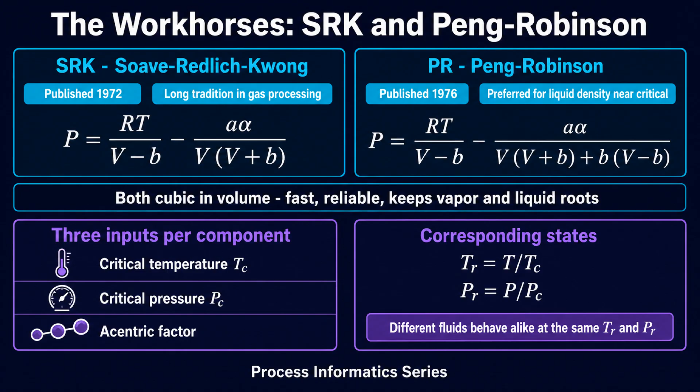Behind all of this sits the principle of corresponding states. Compared at the same reduced temperature and reduced pressure, different fluids behave remarkably similarly. Methane at reduced temperature 1.5 looks much like nitrogen at reduced temperature 1.5. The same equation of state yields more than a volume. From it, you compute each species' fugacity coefficient, an effective pressure correction factor. It is defined so that the fugacity introduced in Chapter 3 equals the coefficient times the mole fraction times the total pressure, and the coefficient approaches 1 as the gas becomes ideal.

That is what makes equilibrium calculations survive high pressure. The equilibrium constant from Chapter 4, written there in partial pressures alone, strictly carries a companion factor, K phi, the product of each species' fugacity coefficient raised to its stoichiometric coefficient.

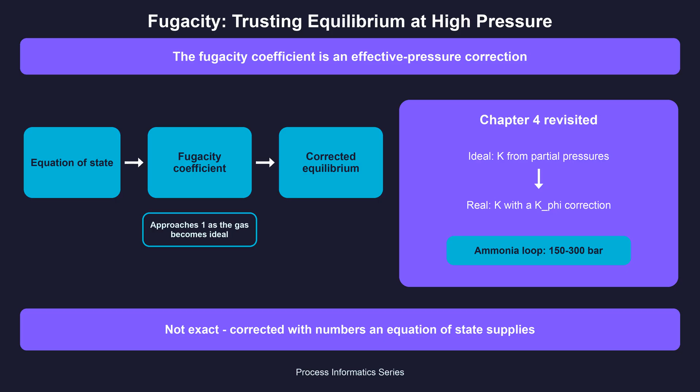In the 150 to 300 bar ammonia loop, that factor is a real correction rather than a formality. These are the same conditions where Z departs from 1 by 10%, so we should expect nothing else. This is how Chapter 4's ideal gas equilibrium arithmetic stays trustworthy at industrial pressure—not by being exact, but by being corrected with numbers that an equation of state supplies.

Cubic equations of state work well for nonpolar and weakly polar molecules: hydrocarbons, nitrogen, carbon dioxide, hydrogen, across gas and high-pressure conditions. They work badly for strongly polar and hydrogen bonding liquids, where the interactions are specific and directional rather than an averaged attraction. Water, alcohols, and organic acids are exactly the cases a single attraction parameter cannot represent.

For those liquid mixtures, engineers use activity coefficient models instead. NRTL, UNIQUAC, and Wilson are the standard names, with UNIFAC available when no data exists and parameters must be estimated from molecular groups. These models describe deviations from ideal solution behavior in the liquid phase, and they are what reproduce an azeotrope.

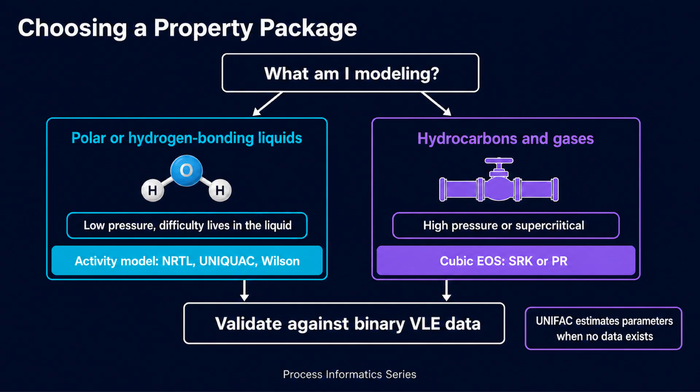The practical guidance is short: polar or hydrogen bonding liquids at low pressure, an activity coefficient model; hydrocarbons, light gases, or anything at high pressure, a cubic equation of state. Either way, validate the choice against measured binary vapor-liquid equilibrium data. This choice is called the property package, and it is the first thing a simulator asks you for. A wrong property package is the classic silent killer of simulation accuracy.

Notice what it does not do. The simulation does not crash. It converges, produces a full heat and material balance, and reports column profiles to 4 decimal places that are simply wrong. Here is the standard example.

Model an ethanol water column with a cubic equation of state, and the azeotrope may vanish. Ethanol and water form a minimum boiling azeotrope at 95.6% ethanol by weight, and that is a real physical ceiling on what ordinary distillation can deliver. If the model misses it, the simulator will cheerfully tell you that a modest number of trays produces pure ethanol and hand you a design that cannot exist.

The defense is not cleverness. It is data. Regress the binary interaction parameters against measured vapor-liquid equilibrium data for the key pair in your system, and confirm the model reproduces the azeotropic composition and temperature before designing anything. That is routine professional practice, not an advanced technique.

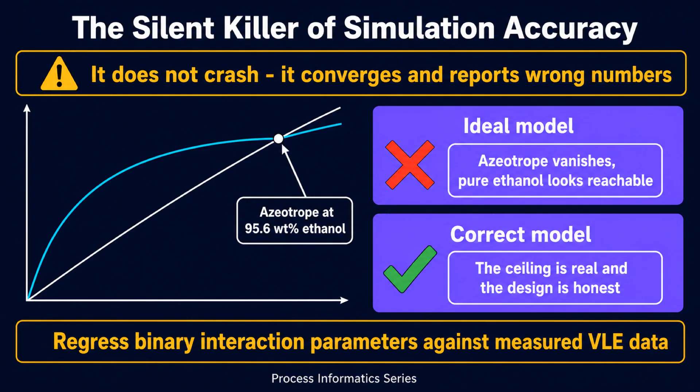Everything in the modern digital layer sits on top of this chapter. A flowsheet simulator is structurally 3 things: mass and energy balances, unit operation models, and a thermodynamic package supplying every enthalpy, entropy, density, and equilibrium constant those models request. The balances are exact and the unit models are approximations, but the thermodynamics is where the physical truth enters, and it is the deepest and least visible layer.

A digital twin is a simulation kept synchronized with the operating plant, and it inherits its property package wholesale. A soft sensor predicting a density, a dew point, or a composition is predicting a thermodynamic quantity, and there is a sharp consequence for machine learning.

A surrogate trained on simulator output inherits the simulator's thermodynamics, its accuracy, and its errors alike. It cannot distinguish a systematic property package error from physics. It learns the error faithfully, then reproduces it fast and with no warning attached. Thermodynamic literacy is what lets an engineer distrust a simulation for the right reasons.

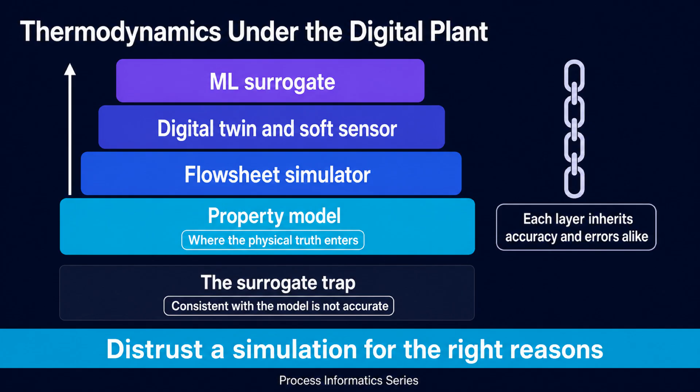Let us close the series. Chapter 1 established energy accounting, the first law, enthalpy, and the fact that energy is conserved but never free. Chapter 2 added direction and limits through entropy and the second law—why heat flows one way, why no engine reaches 100%, and why every real process destroys some capacity to do work.

Chapter 3 applied both to phase equilibrium, the basis of distillation, absorption, and every separation in a plant. Chapter 4 extended the same equilibrium logic to reacting systems, showing how the Gibbs energy change sets a ceiling no catalyst can raise. And Chapter 5 discarded the ideal gas and arrived at the real fluid models that industrial simulation actually runs on. Taken together, these 5 chapters describe what is possible before anyone asks what is practical.

Where to go next? Revisit our Chemical Engineering Introduction series, continue to Process-Informatics Introduction for the data layer built on these models, and try Introduction to Bayesian Optimization for deciding when each experiment is expensive.